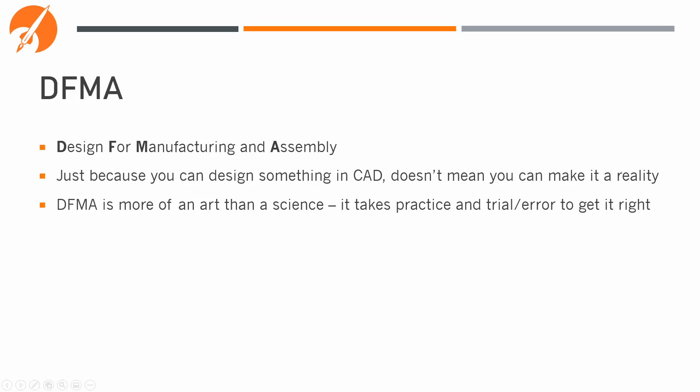DFMA is really two principal concepts, DFM, or Design for Manufacturing, and DFA, or Design for Assembly, that have been crushed together into one larger concept. Oftentimes, DFM and DFA will actually contradict each other, and it's up to you as the designer to balance the two.

Some examples of design for manufacturing are reducing the cycle time, choosing easier to machine materials, using fewer tools, being able to complete the part on a less advanced or expensive machine, having looser tolerances, etc.

Design for assembly includes concepts such as using fewer parts, a poka-yoke or one-way assembly, larger and easier to work with fasteners, fewer fasteners overall, etc.

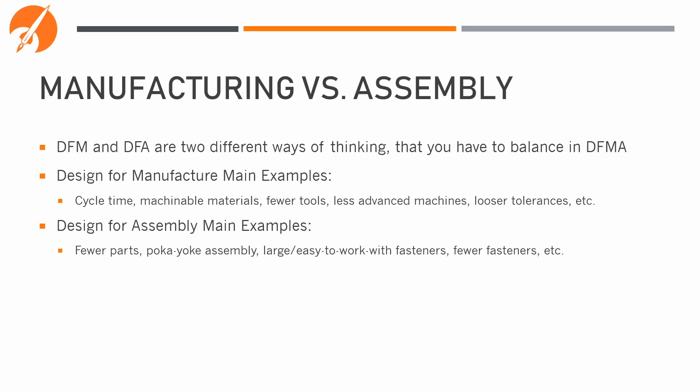Since there's such a difference between the two, we're going to split this lecture into two main parts, the DFM and the DFA. Let's start with DFM.

DFM applies to every form of manufacturing for every type of product. Each different product or type of product will have a different set of DFM rules.

For instance, the DFM for PCBs is different from the DFM for CNCing metal, is different from the DFM for additive manufacturing and 3D printing plastics.

DFM can even vary based on the machine type and the individual capabilities of the machine used. DFM that we use for turning is a lot different than the DFM that we use for milling.

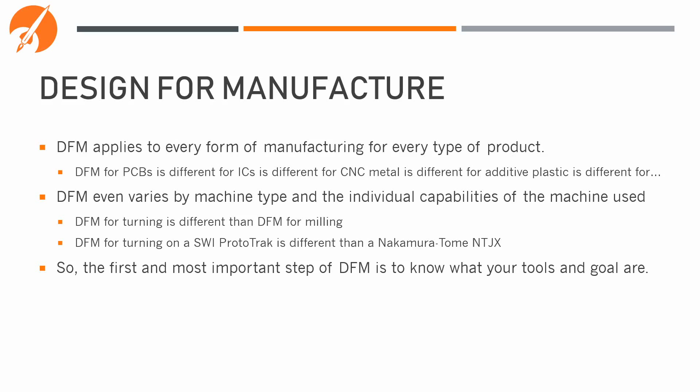And even DFM for turning on an SWI ProtoTrak is going to be a lot different than if you're DFM for turning on a Nakamura. So the first and most important step of DFM is to know what your tools and goals are.

We're going to split DFM into DFM for milling and DFM for turning, and we're going to start each section with a review of what milling and turning are, respectively. If you've just recently taken Mechie 104 or you're very familiar with the manufacturing process, you can feel free to skip these videos.

Milling is the process of removing material with a rotating tool that creates paths through the stock to create the shape of the final part.

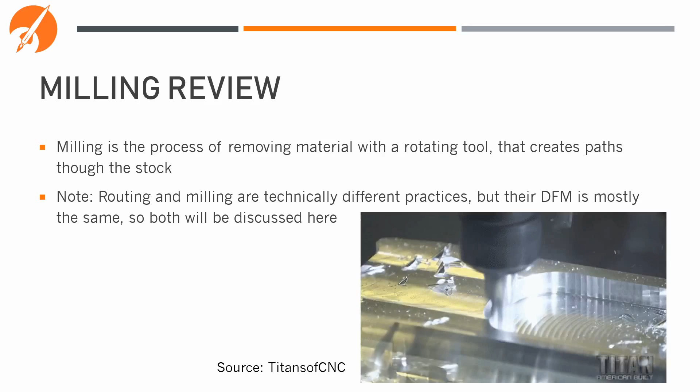It's important to note that in machining terms, routing and milling are different practices, but for the scale and scope that our team works on, both of them have very similar DFM rules. So if you ever need to design something to be machined on a router, just apply the same rules that we're using here for milling.

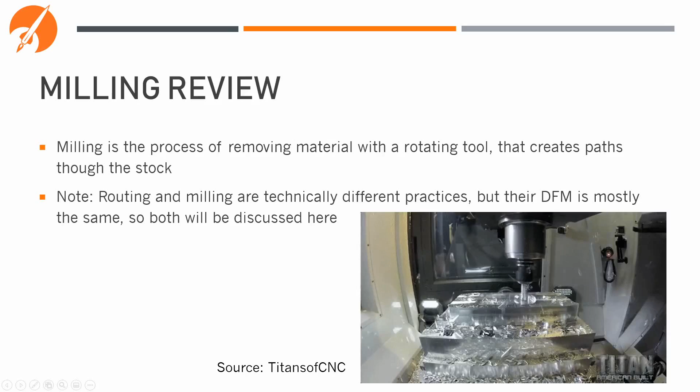Milling tools always have a circular cross-section since they need to rotate around a central axis to work. There are multiple different types of milling tools that will determine how the final part geometry they cut looks.

Unfortunately, unlike turning tools, there is no standard code or identifying mark for milling tools, so it can get a bit confusing if you're jumping between multiple manufacturers and sources as you're trying to acquire tools.

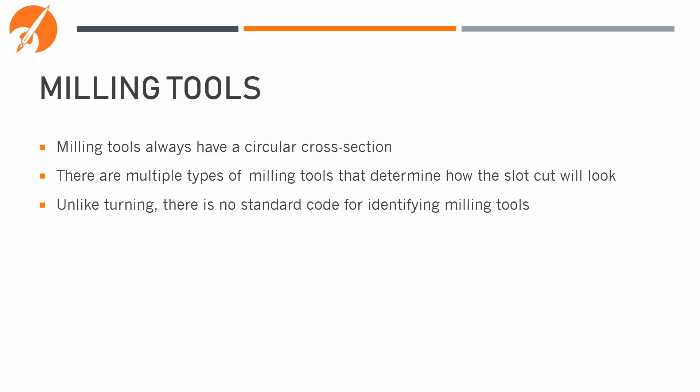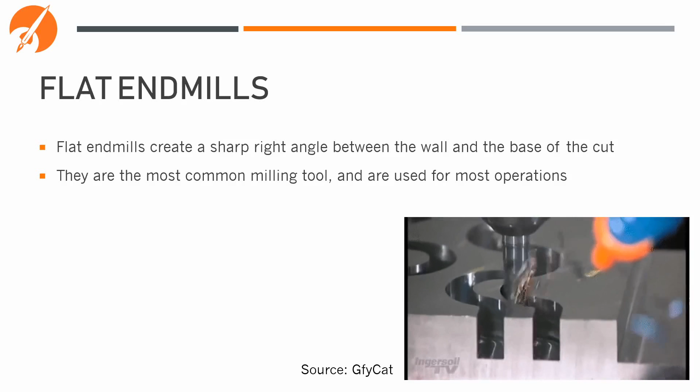The most common tool for milling is the flat end mill. Flat end mills create a sharp right angle between the wall and the base of the cut, and can cut with the bottom or sides of the tool.

Ball nose end mills are like a flat end mill, except they come to a 180-degree ball at the base of the end mill. These can be used to create smooth surfaces on all areas of a part, or cut slots that have a curved bottom to reduce stress concentrations.

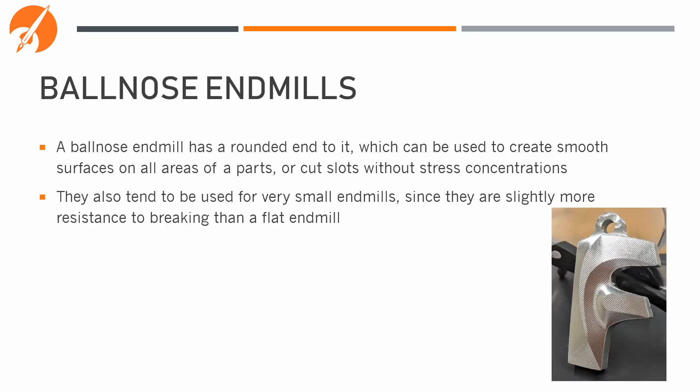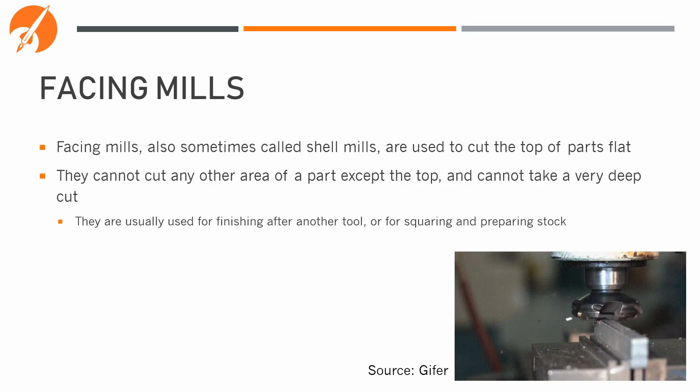Facing mills, also sometimes called shell mills, are very large tools used to cut the top of a part flat. They cannot cut any other part except for the top, or what's facing upwards in the machine, and they can't take a very deep cut. They're primarily designed for flattening or squaring up a piece of material after it's been rough cut with, say, a bandsaw.

Chamfer mills are mills used for finishing operations, applying chamfers to the corners of parts. Chamfer mills can only cut a single angle of chamfer defined by the tool geometry, so you'll usually see them at a 30 degree or 60 degree angle, but you can get custom ones for any chamfer angle you need for your project.

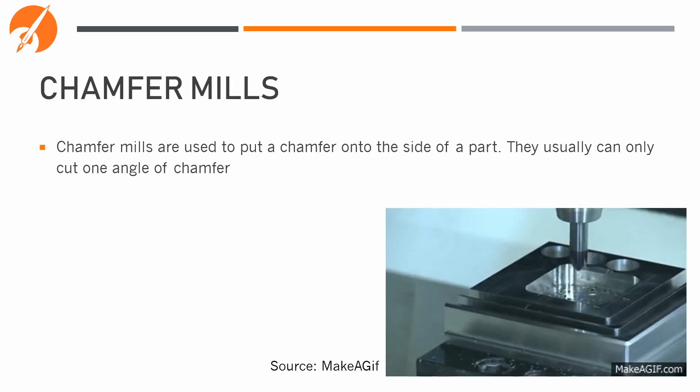Corner radius mills are very rarely used, but they are still important to keep in mind. If you needed to round off the top corner of a part, a corner radius mill can impart a determined radius to that corner. The corner radius mill only works for a single radius per tool, so you usually see them sold in sets with quarter-inch increments between the radii.

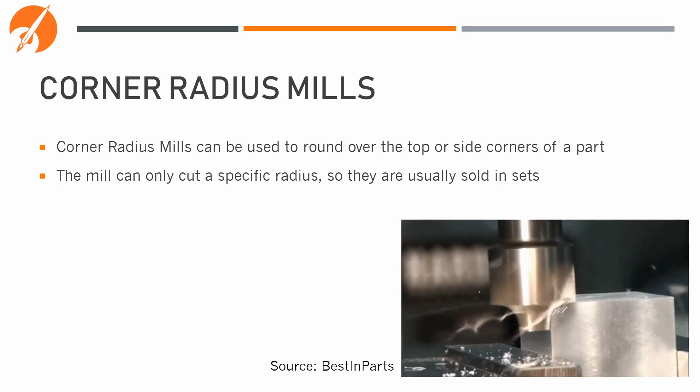An engraving tip is a tool that can engrave very light writing or images into the top of a part. It's not made for any sort of material removal, but it is good for putting identifying marks into metal.

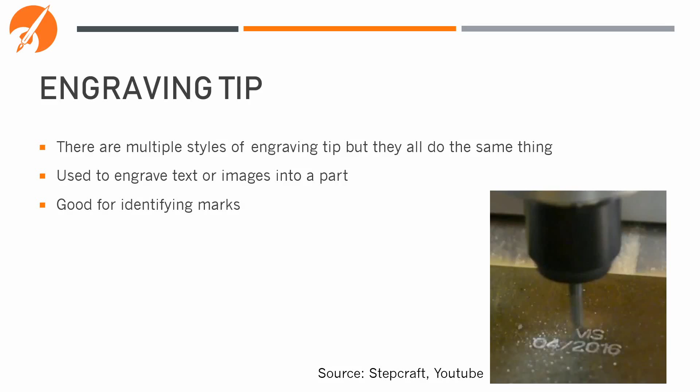Tools used in milling are usually either made of carbide or high-speed steel. Carbide tools are more common in this day and age, but a lot of the older machines at RIT run better with high-speed steel.

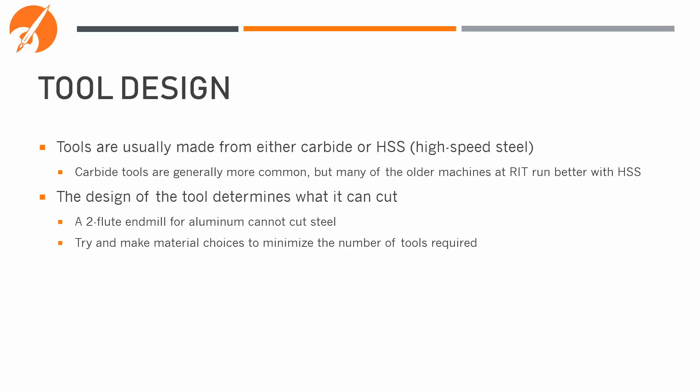The design of the tool can determine what materials it can cut. For instance, a lot of end mills designed for aluminum might only have 2 flutes, but if you try to cut steel with it, the tool would snap instantly. A tool for aluminum can also usually cut other soft materials like copper, and a tool for hardened steels can also usually cut multiple grades of steel. Try and make material choices that minimize the number of tools required for your operation.

Tools are sold in nominal sizes, ranging usually from an 1/8 inch to a 1/2 inch, although larger and smaller are available. They usually increment in 1/8 inch or 1/4 inch values through that scale.

Tool length is usually a function of the diameter of the tool. The larger the diameter of the tool, the longer maximum stick out the tool will have. For instance, if I wanted to cut a slot that was an 1/8 inch across but 6 inches deep, I probably won't be able to find a tool that can do that. But if the slot was a 1/2 inch across and 6 inches deep, that's probably more realistic.

It's also important to note when shopping for tools that the length of the tool is not the same as its maximum depth of cut. The machine needs to use some of that tool length to hold on to it, usually 1 to 3 times the tool diameter. So with this example, if I have an 1/8 inch tool that's just under 2 inches long, I can expect to cut a slot or feature that's at most 1.5 inches deep.

The best tools are the ones that have the largest diameter and are as short as possible. These tools are the cheapest, the easiest to work with, and last the longest. So while you're designing, try and make features that can be machined with these styles of tools.

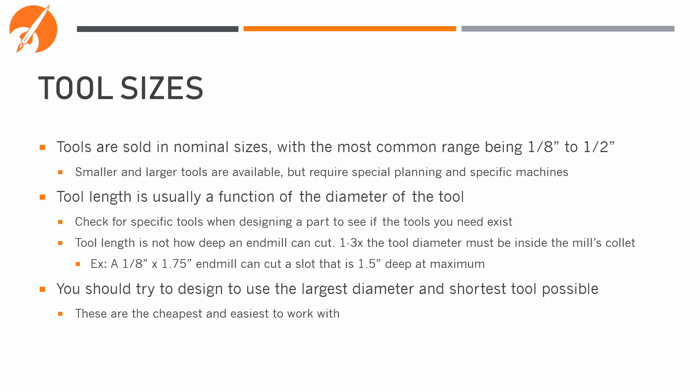We're next going to take a brief look at the anatomy of a mill, just so you can better understand how it functions when designing parts. Every mill looks very different, and they all function in different ways to achieve the same end goal. We're specifically going to look at the PCNC 1100 from Tormach, since it's the most used CNC here at the RIT campus.

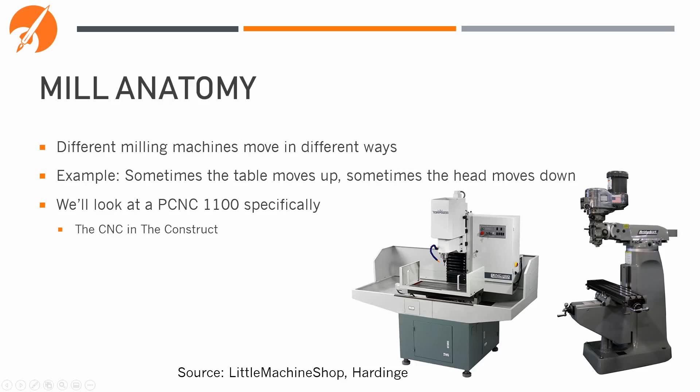The spindle is the main driving force of the mill. It's what rotates the tool, and it defines how fast the machine can run, how much material it can remove for a given amount of time, etc. The end of the spindle is called the spindle nose, and this is where the tool is installed. On the Tormach specifically, the entire spindle and spindle nose assembly moves up and down in the Z-axis.

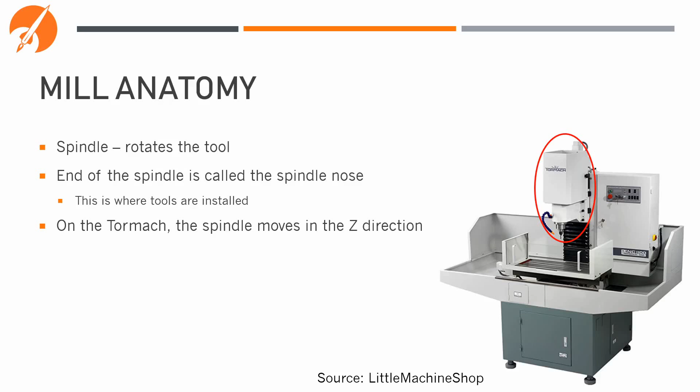The work table is how you secure your workpiece or stock to the machine. It's also sometimes called the saddle in older or larger machines. On the Tormach, the work table moves in the X and Y axis.

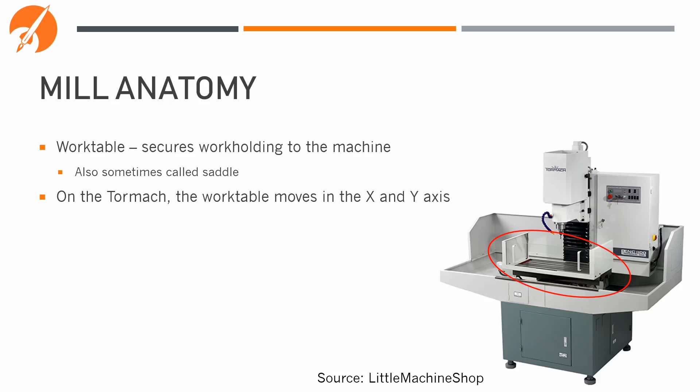On a manual mill, there will be a handle on each axis that you can use to move it. On this Bridgeport, for example, you can move the Y-axis by spinning the handle in the front, and the X-axis by spinning one of the handles on either side of the saddle. There's also the knee, a large rotary knob used to raise and lower the entire saddle assembly. On a manual mill, you generally cannot move more than one axis at a time, so if you're designing a part for manual machining, it's important that all faces are either in line with or perpendicular to one of the cardinal axes, X, Y, or Z.

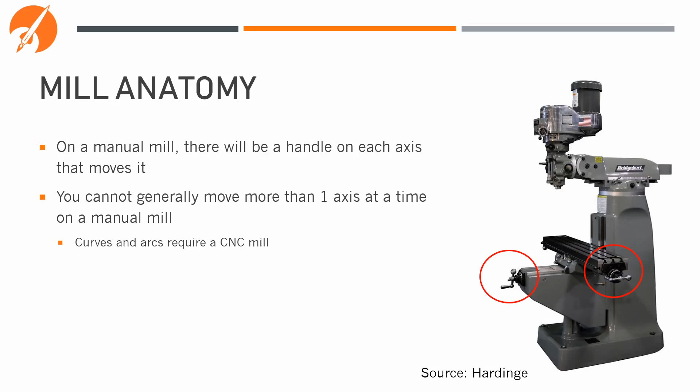If you have a part that requires curves or arcs, generally you need to do it on a CNC mill.

I'm also going to touch briefly on fourth axis milling. This is not a technique you'll see used very often, but it's an important tool to be aware of. Fourth axis milling allows milling around the surface of a round part. Generally, the machine will contain a fourth axis, in addition to X, Y, and Z, which allows the part to be rotated, and then the same X, Y, and Z axis can be applied. You could use this to engrave on the side of a round part, machine a flat into a round part, or drill holes at predetermined distances around a round part.

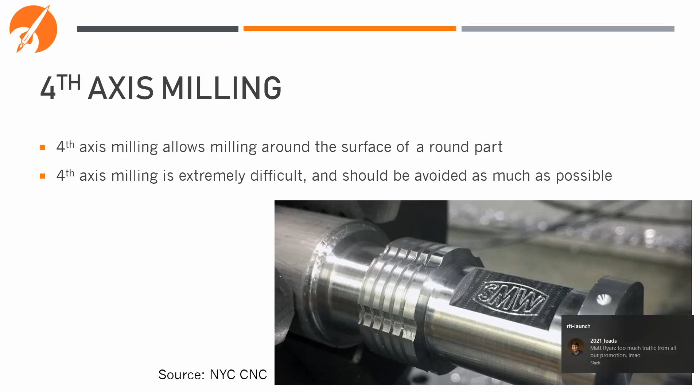So let's review what we just talked about. Different milling tools can be used for different shapes. A shorter and larger diameter tool is always better, and fourth axis machining should be avoided as much as possible, but it is there if you need it.

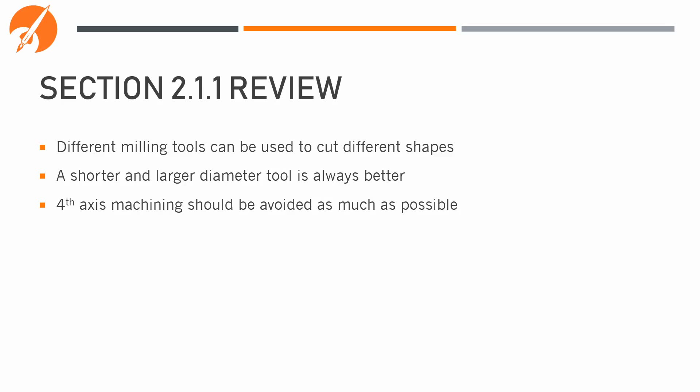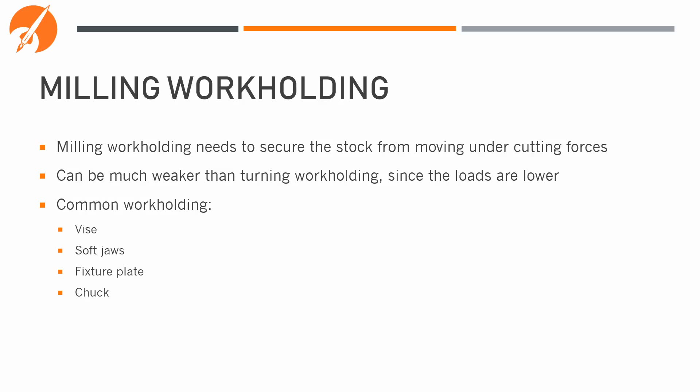Let's talk about work holding for milling now. Milling work holding needs to secure the stock from moving under cutting forces. Milling work holding is generally weaker than turning work holding since the loads are lower. This gives us a lot more freedom in milling as we hold the part than it would in turning. Some common work holding examples are vises, soft jaws, fixture plates, and chucks.

The most common work holding for a mill is the milling vise. The part is clamped between two parallel faces that apply up to 5 tons of pressure. A vise can only work if it has 2 flat parallel faces on the part. For instance, you can grab onto a cube in a milling vise, but you can't grab onto a sphere.

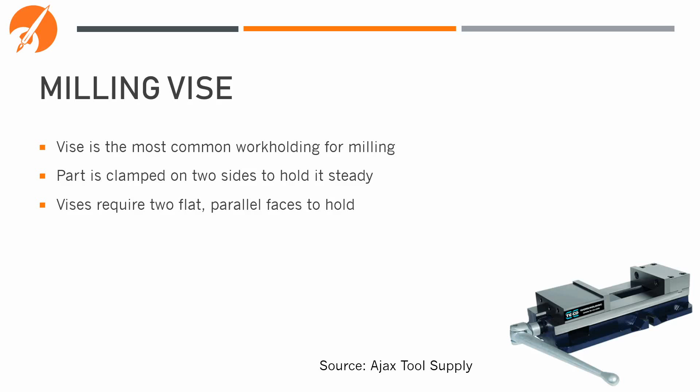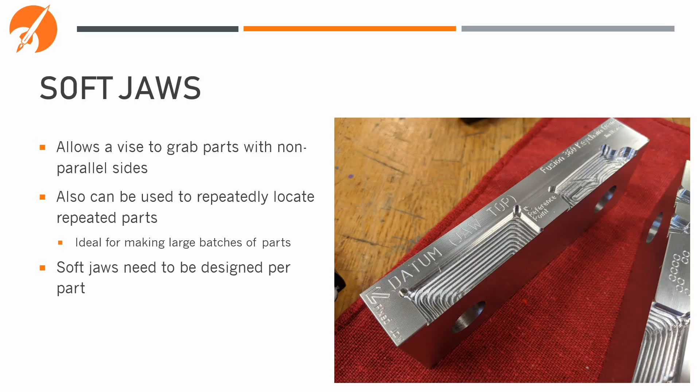Fixture plates allow you to bolt down very large parts to the machine directly. They're good for large or awkward sized parts, but they have the drawback that you cannot machine near the fixture clamps. This usually means that you'll have to end up doing multiple setups to get cutting all the way around a large part.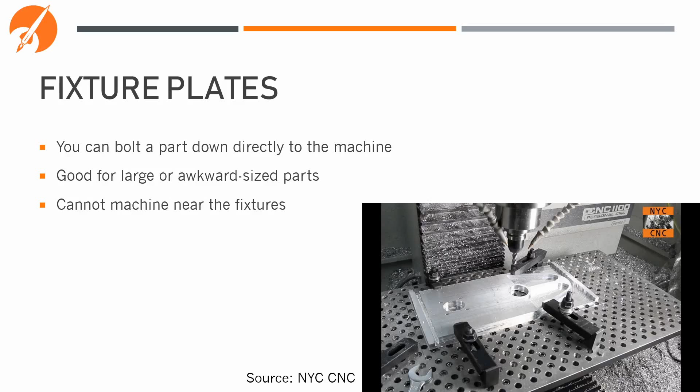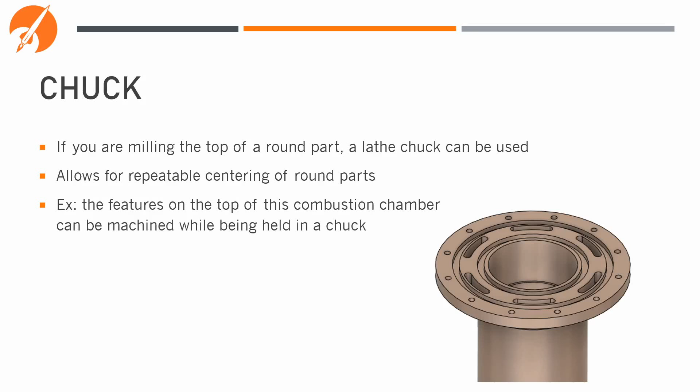If you are milling the top of a round part, a lathe chuck can be used. This allows for repeatable centering of a round part. For example, the features on the top of this combustion chamber can be machined while being held in a chuck around the round of the combustion chamber and nozzle below. This would be a lot easier than trying to clamp it in a vise, which is impossible since it's a cylinder, and allows us to not have to waste material on soft jaws.

Work holding is incredibly important because if your part can't be held, it can't be machined. You always need to consider work holding as you're designing your parts.

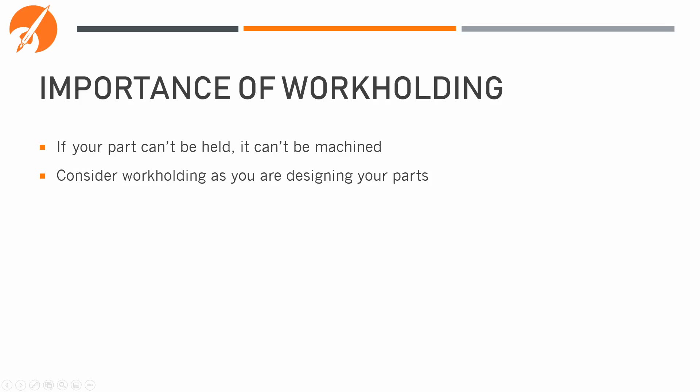Another important aspect of work holding is multiple setups. Multiple setups allow us to flip, rotate, or otherwise reorient the part in between different operations to access more sides. Relative critical features should always be designed to be completed in one setup. Every time we move, flip, turn, etc. the part, there's a chance that we're introducing inaccuracy. So, for example, you don't want to bore halfway through a cylinder, flip it over, and bore the other half, because there's a chance that those 2 holes you made won't perfectly line up. There might be a small lip, or one might be slightly larger or smaller than the other.

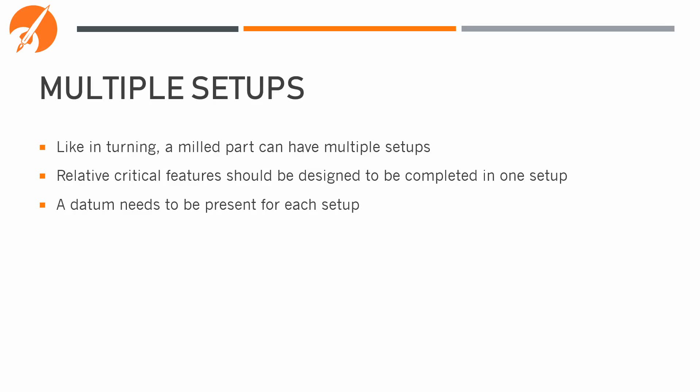Another important thing to consider is that you need a datum between each setup. A datum is a feature that was machined in a previous operation that we can then re-reference the position to help the machine know where it is.

Let's take a look at this part, for example. This is a housing for a remove before flight arming switch. How would you make this part?

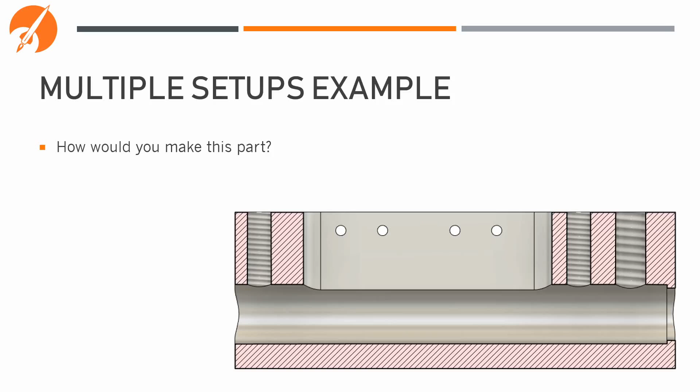I found that it's best to make this part in 4 operations. The first is drilling the small holes on the side. This might seem a bit weird to start with, but it's important that we start with the drilling. Drills are very susceptible to breaking if they go through an interrupted cut. If we were to mill out the pocket that goes through these holes first, and then try to drill, there's a chance the drill would shatter when it hits that open space. Larger drills are less susceptible to this, but it's best to avoid whenever possible.

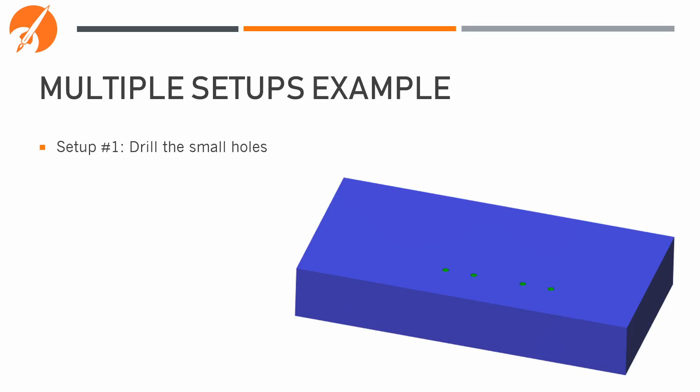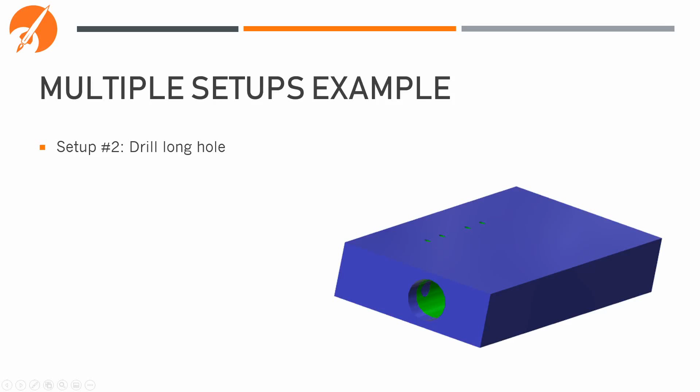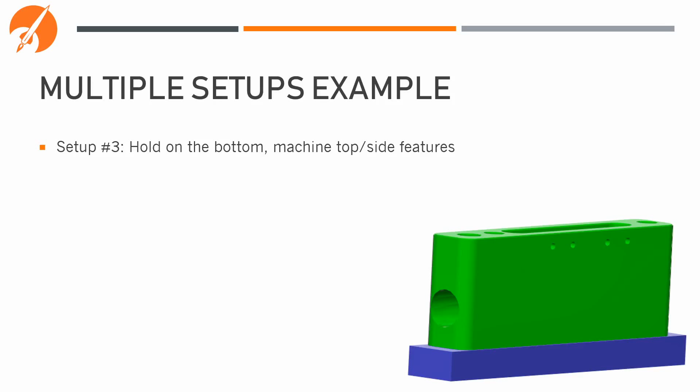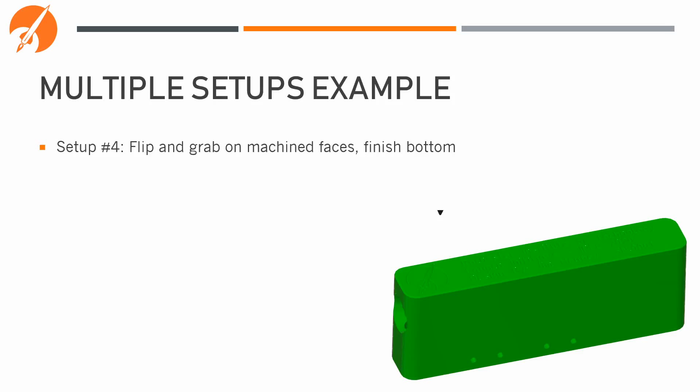Once those holes were drilled, we then drill the long hole down through the entire length of the part, and then open it up to final diameter with an extra reach long end mill. After that, we can grab onto the bottom of the stock, and using one end mill, machine around the entire perimeter and the inside pocket of this part. The last setup would be to flip and grab on that newly machined surface, using one of the newly machined sides as our datum, and then finish the bottom with a face mill and an engraving bit.

So in review, there are multiple forms of work holding for milling. Work holding must be considered when designing a part, and the same rules for multiple setups in turning apply to milling.

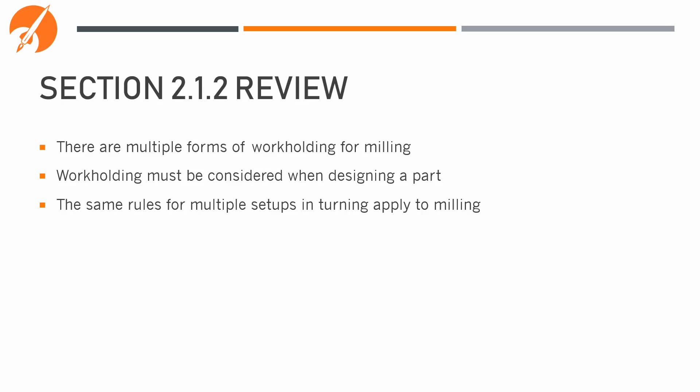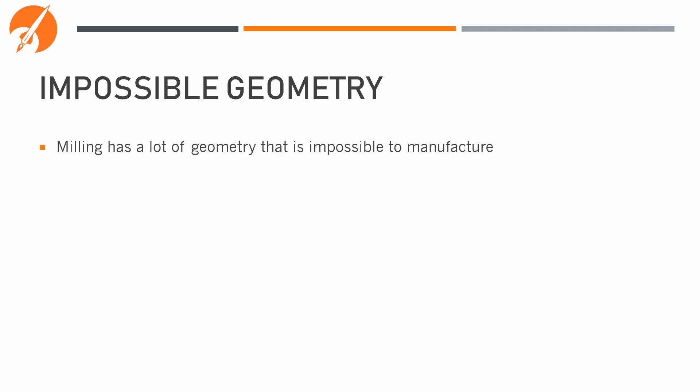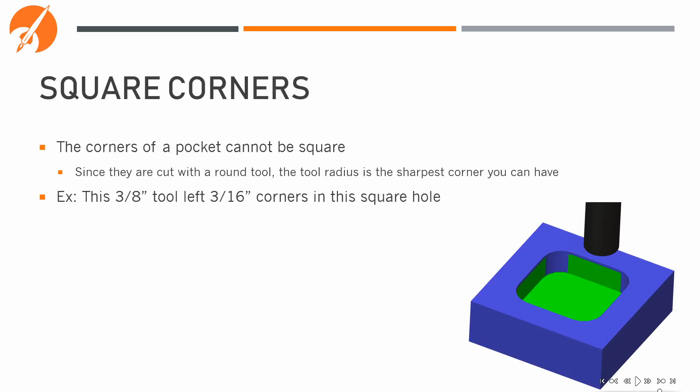Let's talk briefly about impossible geometry. There's a lot of geometry you can design in CAD that cannot actually be replicated using a milling machine. The most famous example is square corners. If I wanted a part with an exact square pocket, and sent it to the machine, this is what I'd end up with. As you can see, there are curved edges where there should be sharp corners. Since the tool for milling is round, it can only cut corners as sharp as the radius of the tool. For example, this 3/8 inch tool left 3/16 inch corners in the square hole.

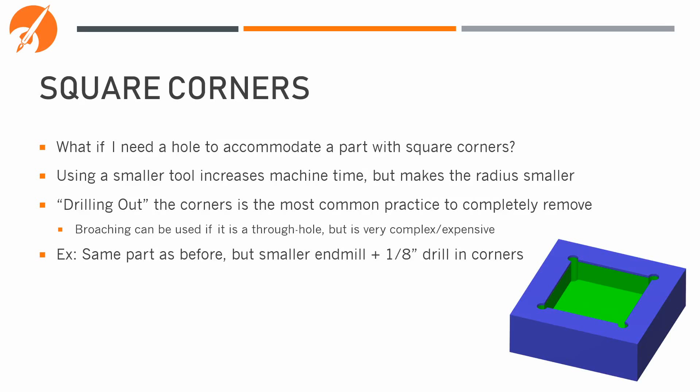But what if you actually need to fit a square part into that hole? You could use a smaller tool, which would increase machine time but decrease the corner radius. For example, if you drop all the way down to an 1/8 inch tool, you'll only have a 1/16 inch radius. If that still won't work, the most common solution is to drill out the corners. When you drill out the corner, you start by drilling 4 holes where the corner should be, then milling out the rest. What happens is when the mill gets to the radius where it should be, it'll just be hitting the open air of the drilled hole. This is the same part as before, but this time I used an 1/8 inch end mill and then used an 1/8 inch drill to drill out the corners.

The soft jaw example from earlier is a good example of drilling out the corners. We needed to hold a square part on the left side of the soft jaw, but we obviously can't cut the square corners. So, as the end mill was making its finishing pass around the outside of that part, I programmed it to also go in and make a small loop in each corner.

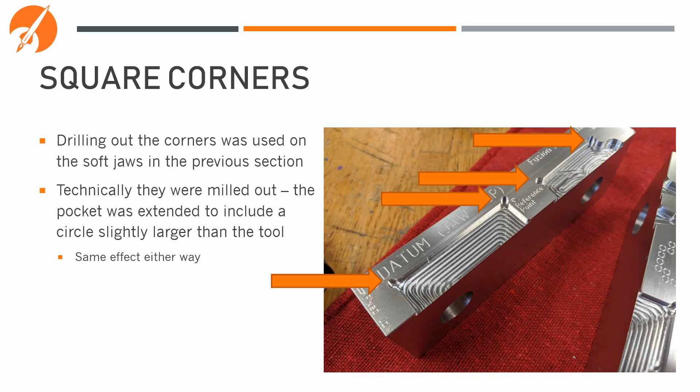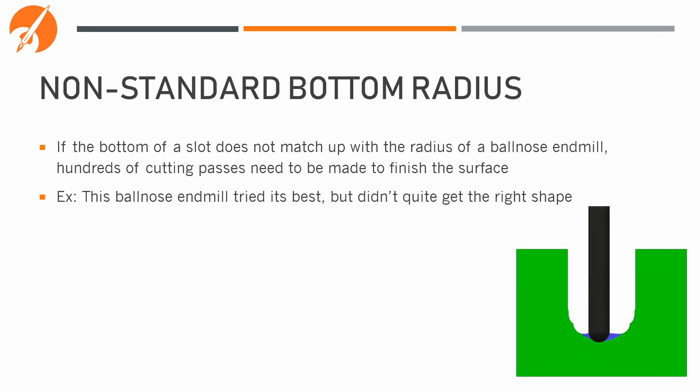Another one to look out for is tapered walls. Tapering the walls of a part on a mill is a very complex operation or requires very expensive tools. In general, your part will end up with a stepped look. It's best to avoid any tapered parts altogether where possible.

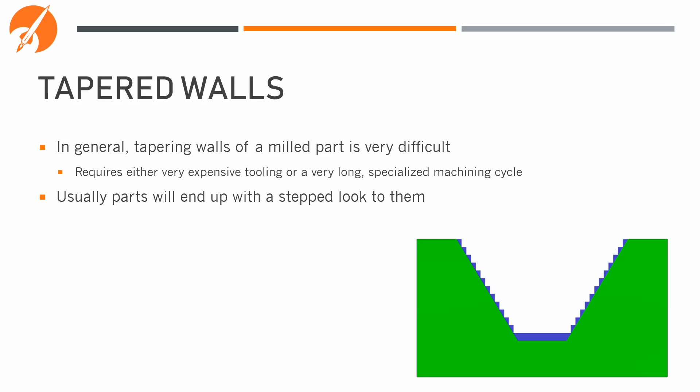In review, there is some impossible geometry that must be avoided in milling. Square corners are impossible and require special machining operations. The bottom radius of a slot should match the radius of a ball nose end mill, and tapered walls are very difficult to achieve and should be avoided where possible.

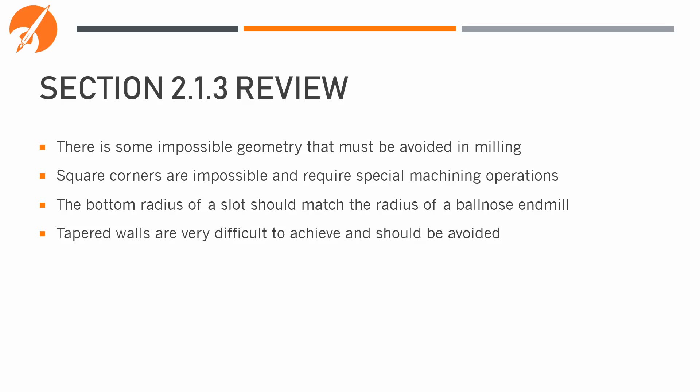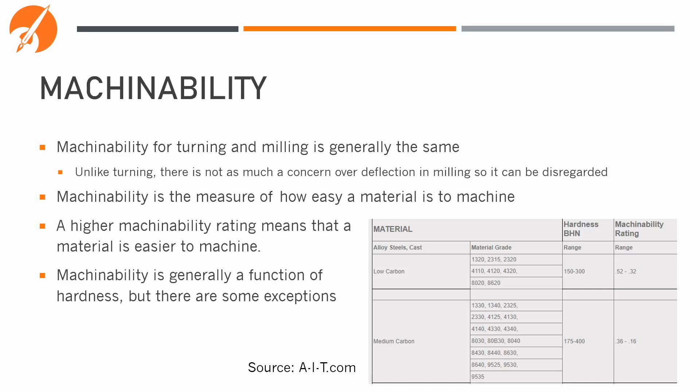While round stock can be used for milling, square stock is more common. We'll talk about round stock later on.

Square stock can be bars, plates, or sheets. If you're wondering what the difference between a plate and a sheet is, generally the difference is that a plate is more than 1/8 inch thick. Other than that, they're identical.

Bar stock is sold in nominal lengths and widths, and the depth varies depending on your needs. For example, you can find nominal stock sizes of 2 inch by 2 inch, 2 inch by 2 1/4 inch, 2 inch by 2 1/2 inch, etc. But the entire depth of that piece of bar stock can usually be defined by you down to the fraction of an inch.

Like with round bars and most long bars in general, it's cheaper to buy one long bar than multiple short ones.

Plates and sheets also come in defined nominal thicknesses. For anything above 1/16 of an inch, it's increments of 1/8 or 1/16 of an inch. For anything below 1/16, it usually breaks down into gauges, and then it follows the American gauge standard.

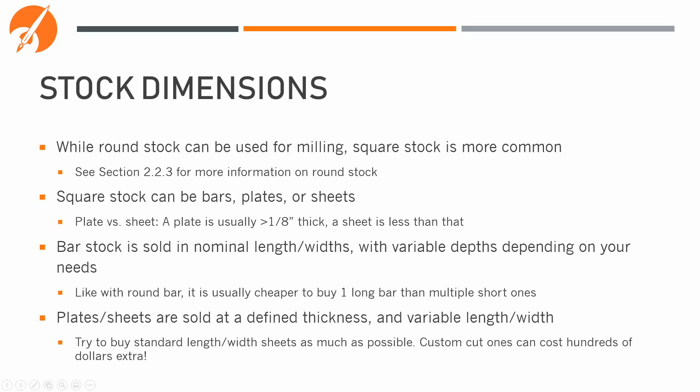When you're choosing plate or sheet stock, it's important to consider their X and Y dimensions. Plates are usually sold at nominal sizes for the X and Y, and if you need to buy something off nominal, it may add hundreds of dollars to the cost of the material. Try and buy pre-cut or standard size plates whenever possible.

Let's do a quick example of choosing stock. Let's say we need to make 100 of this keychain. It's just over 2 inches tall, a little bit over 1 1/8 across, and under 1/4 inch thick. Each part will be machined independently, so we need one piece of stock that encapsulates each of the 100 keychains. We can't, for example, load a plate into the machine and have it cut out dozens of parts from it. What's the best stock option for cutting something like this?

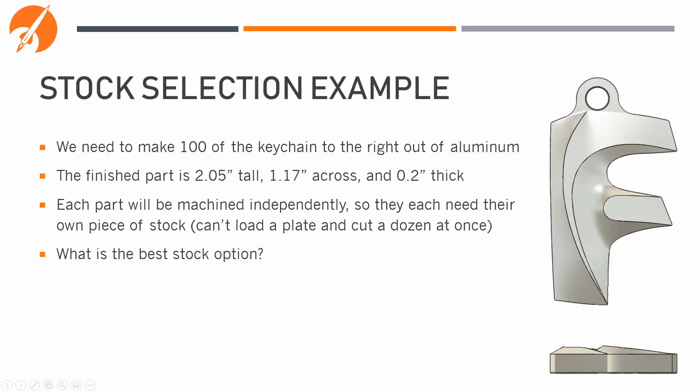If we were only making a few, the cheapest and easiest solution would be to get a 1/4 inch plate and then use a bandsaw to cut X and Y cuts into the final shape parts. If we need this many though, a bar is going to be easier to work with. What we could do is load the bar into an auto-cutting bandsaw, have it move forward slightly, make a slice 1/4 inch down, move forward, slice 1/4 inch down, etc.

A 2 1/8 inch by 1 1/4 inch rectangular bar would give us enough breathing room to work with. But we're going to go for a 2 1/4 by 1 1/4 rectangular bar instead, since 1/4 inch increments in stock are more common than 1/8 inch increments, they cost a lot less. A larger tool may be required to rough out this part already, so that little bit of extra stock we're taking off isn't really the end of the world.

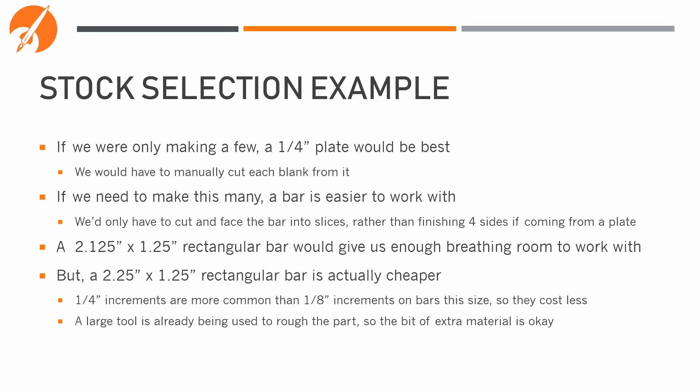It's always important once you choose a stock size to think about what would happen if you go up a size or down a size from the supplier. Sometimes you might be surprised.

One of the hardest concepts to wrap your head around when it comes to stock pricing is that it's not linear. If I had to buy a 1 inch by 1 inch by 1 inch cube of aluminum versus a 1 inch by 0.2 inch by 5 inch bar of aluminum, the bar would be significantly cheaper even though it's the same amount of material.

Stock that is large in one direction and small in the other two is cheaper than stock that is about the same in all directions. This is because of the way that a bar is manufactured. Usually all parts are made in 8 or 12 foot increments. The machinery required to make a 1 inch by 1 inch bar will be more expensive than a 1 inch by 0.2 inch bar, and then the supplier just cuts it down to size.

Try to design parts that only need long stock in one direction, or is split into multiple parts where possible. The absolute worst stock shape you can have is a cube. Try to avoid that at all costs.

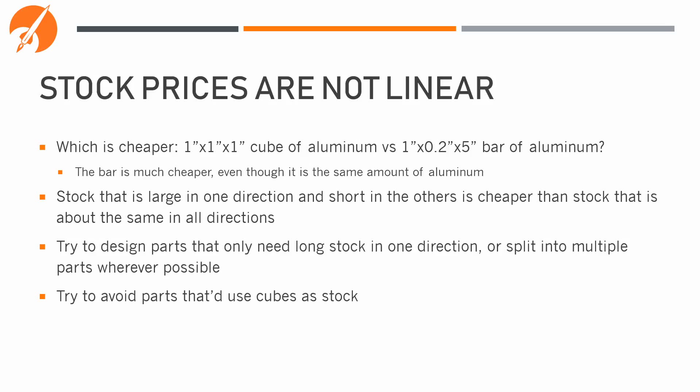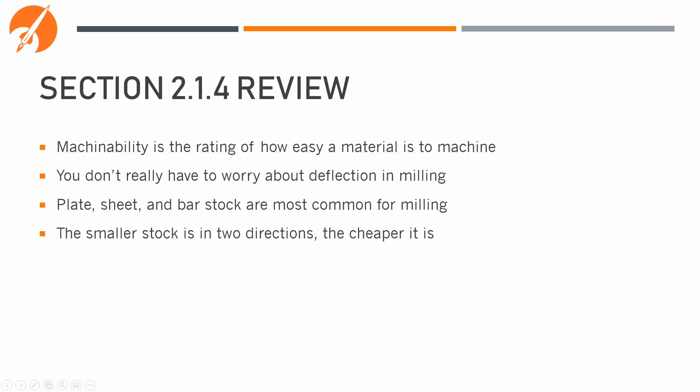So let's review what we just discussed. Machinability is the rating of how easy a material is to machine. You don't really have to worry about deflection in milling. Plate, sheet, and bar stock are most common for milling. And the smaller the stock is in two directions, the cheaper it will be. We're now going to move into DFM for turning.